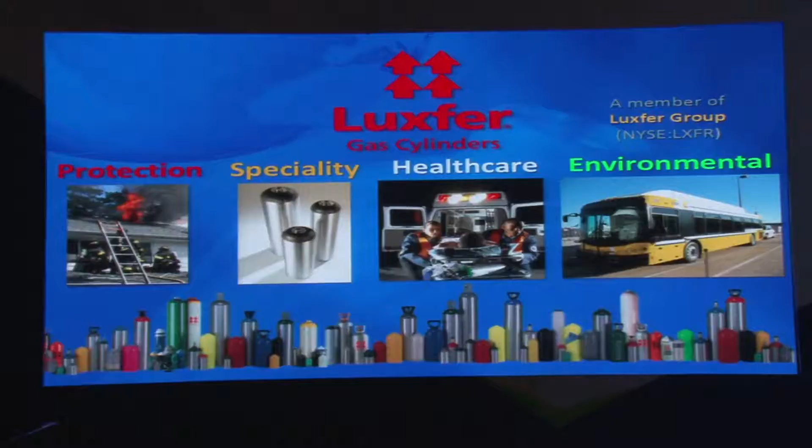One of these cylinders you can see here, very lightweight. 100% of all firefighters in the US have these breathing air cylinders on the back. Today, 70% of all firefighters in Europe have this lightweight construction on the back. This is just one of our products. You can also see protection used in the aviation industry, inflation cylinders for oxygen supply. These are all from our typical product range.

Mainly in Asia Pacific, South America, and other parts of the world, we are still thinking in steel. I've been working since 1989 on composite materials, and you can see how far advanced these composite materials are today in this slide. For instance, the A380 has today 35 tons of structural components made from carbon fiber reinforced plastics. So with every generation we're replacing more and more metals with carbon fiber reinforcements, but other applications as well. Now the carbon fiber industry is starting to penetrate even the automotive industry.

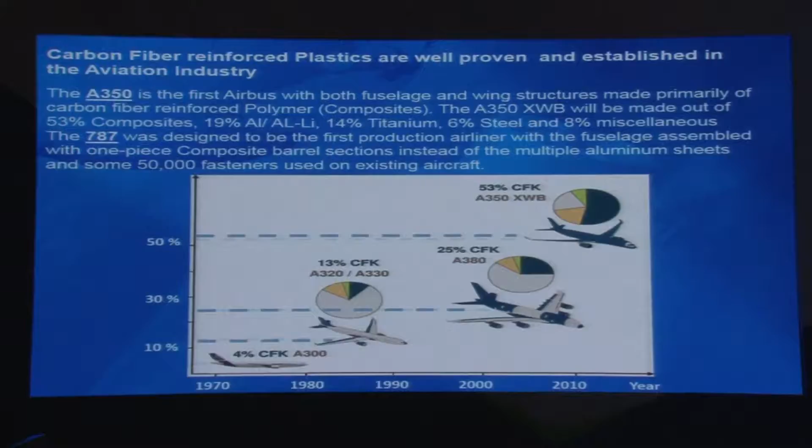If you're buying today a new BMW series, the whole roof and trunk is today made from carbon fibers. So next generation, you can see the development since 1970. The first aircraft had just 4% carbon fiber reinforcement on board. Today, the A350 will have 53% made of carbon fiber reinforced plastics.

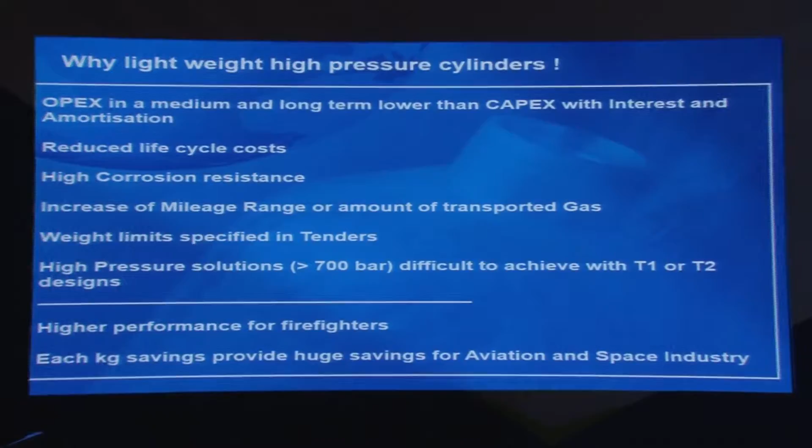So why lightweight high pressure cylinders? For firefighters and other applications, it's more convenient. Firefighters show much higher performance if they have a lighter cylinder on the back. But in the end of the day, for gas transport, for automotive, especially in Europe and the US, we are thinking OPEX, meaning operational expenses. So we are not so focused on CapEx. Of course the first investment is important too, but we are looking as well at the operational costs.

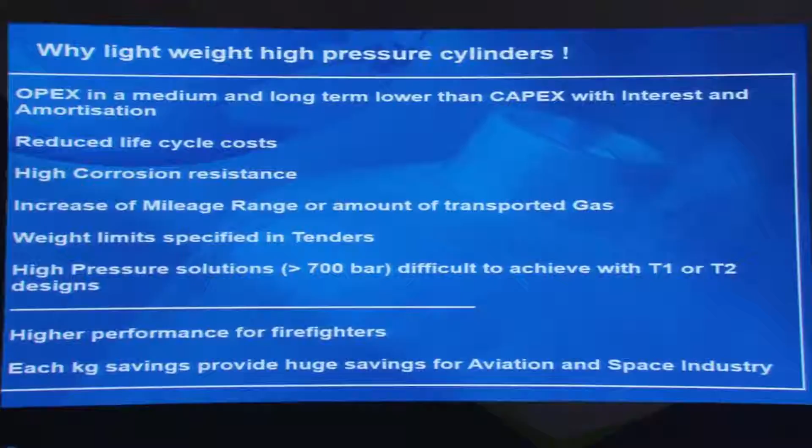So a lot of advantages, and now we are looking at the hydrogen economy and hydrogen vehicles in the future, which we are expecting soon, especially in Europe, where we have to build 700 bar service pressure cylinders. Can you imagine the explosive load in a 700 bar cylinder filled with hydrogen? One of the backgrounds is that Germany wants to be more and more independent, and you can see last year 30% of all electricity was made from renewables.

So it's a little bit insane: we have today 22,000 windmills, and the majority of this green energy, 13.3%, is coming from wind energy, followed by biomass, solar power, and hydropower. So in this energy mix, the intention of the German government is to lift green energy up to 50% content by 2030.

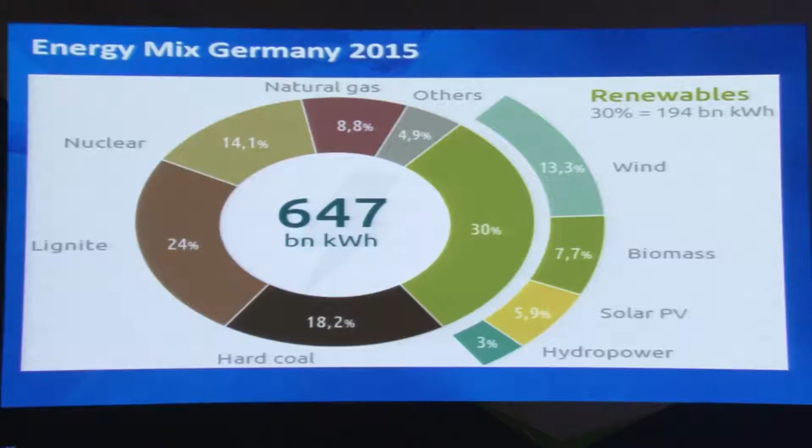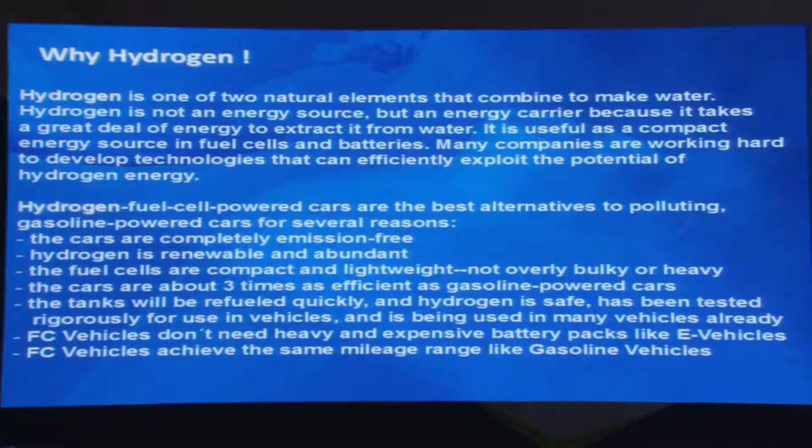One of the intentions is to use this green energy to make hydrogen. So you take water, and by electrolysis you make hydrogen out of the water, and we put the hydrogen in the car so that we have a complete green supply chain. So why is the automotive industry still thinking about hydrogen-powered cars? Because this car will provide the same mileage range as vehicles today, and it will have the same weight as vehicles today. That's mainly why they say hydrogen is the only future.

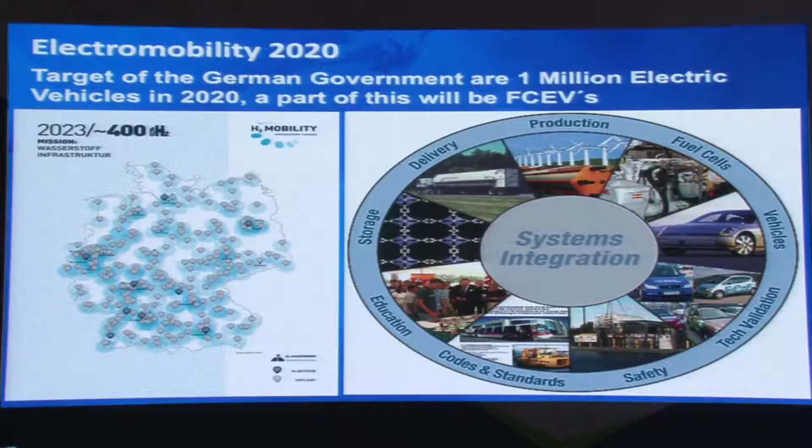We have a government program called Electromobility 2020. The first 20 hydrogen filling stations are in operation. It's the intention of the German government to have 400 public hydrogen filling stations by 2023, with full safe system integration. That's a hell of work behind it. It starts with hydrogen gas transport, where we are thinking today about 500 bar containers to transport the gas, the hydrogen beside liquefied hydrogen.

But in the end of the day, if you see the requirements coming for the vehicle, the standards for hydrogen-powered vehicles or fuel cell vehicles, it's way beyond CNG or LNG or LPG. They are doing much, much more, and typical examples you can see here in the snapshots.

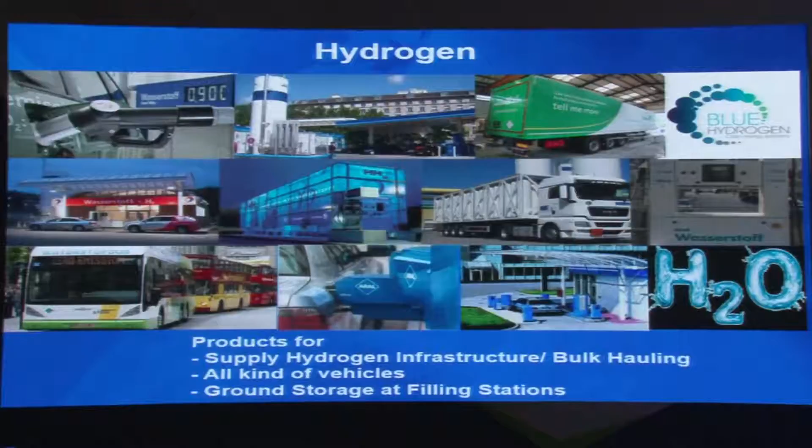Dispensers are already available. We have already 20 hydrogen filling stations in operation. Since 1997, buses are on the road in cities like Hamburg or Stuttgart, with very good field test experience, and the automotive industry is working to improve fuel cell vehicle performance. For example, the A-Class, built with a fuel cell in 2004, followed by the B-Class in 2008, shows improvement in range and size of the gas tank systems.

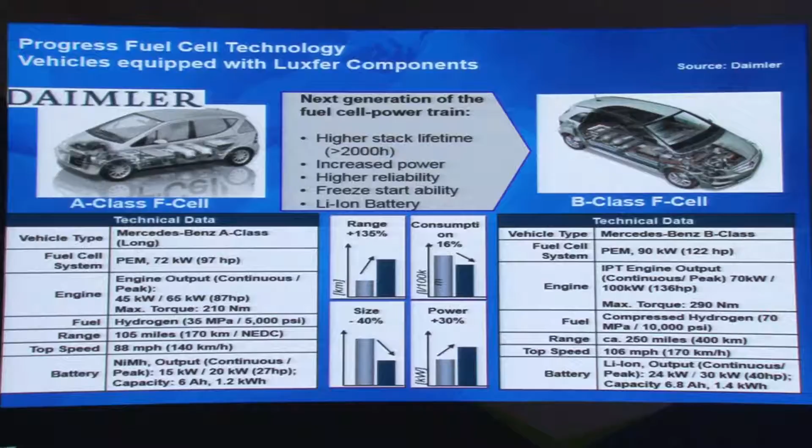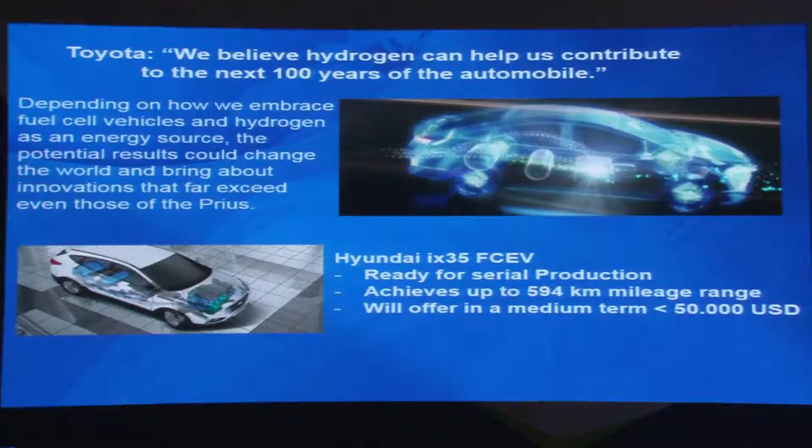Anyway, I'll repeat: standards for hydrogen vehicles are far beyond other standards, and the CNG, LPG, and LNG industry should learn from this. Even if you Google Toyota hydrogen, you'll find very interesting information. Toyota is highlighting that they see the fuel cell car as the future, as they saw the hybrid 20 years ago.

Hyundai is very far advanced, spending hundreds of millions of dollars every year, and the Hyundai iX35 is ready for serial production. It already achieves close to 600 kilometers mileage range, and in the medium term this car will be available for less than $50,000. For the US in 2014-16, the Toyota Mirai and other vehicles are already planned and ready for sale.

The question is now chicken and egg: where's the infrastructure coming from? But in the end of the day, especially in Germany, we are working hard on this. Our expertise comes from 20 years working on hydrogen systems for vehicles. We've equipped hundreds of buses, vans, forklifts, and other vehicles.

We are talking today, for instance, about bus systems with a service pressure of 350 bar. The filling pressure is always 440 bar to have the right temperature compensation, and the automotive industry wants up to 40 kilograms of hydrogen on board at 350 bar.

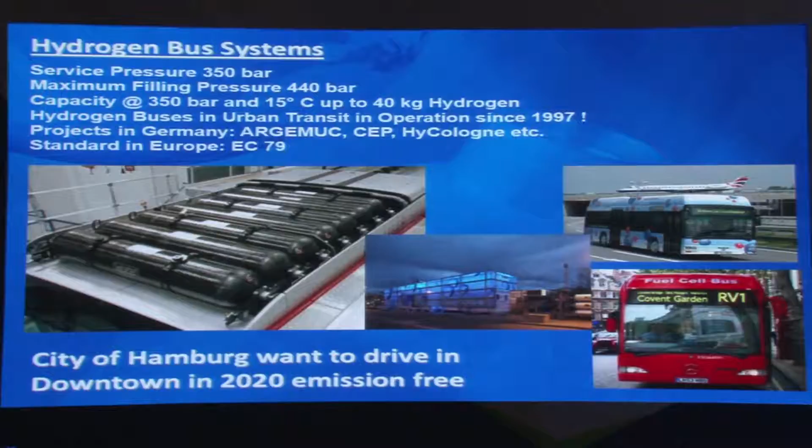We've had many projects, even at airports in Germany, and interestingly the city of Hamburg has made the commitment to drive emission-free by 2020. That means we will see, especially on the bus side in Hamburg, a mix of pure electric buses and hydrogen-powered buses. North America is working on hydrogen as well, not as much as Europe, but we have a lot of prototypes running too.

Where are the technical challenges? For instance, the valve. If you see an LPG valve today, you can buy it extremely cheap. The valves we have to make for 350 bar and 700 bar hydrogen are really complicated, and at the moment there are just 3 companies which have certification to bring it into operation.

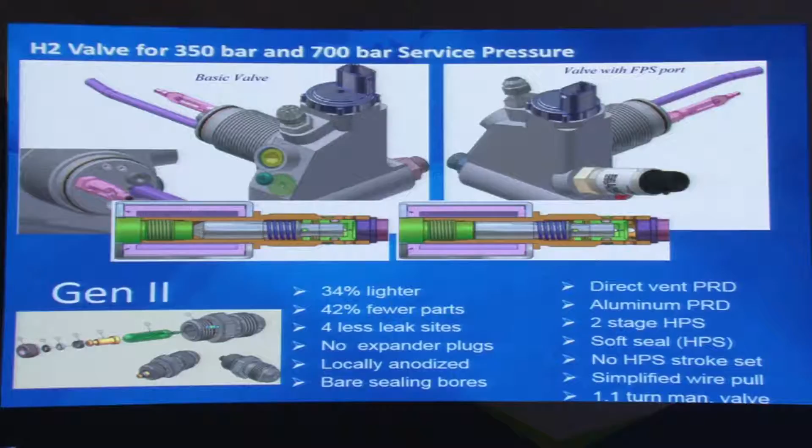We have an integrated pressure sensor, an integrated temperature sensor, and of course pressure relief devices, and the valve and the car communicate with the dispenser. That means we measure online the temperature during fast fill, and as soon as the temperature goes beyond 85 degrees C, the car tells the dispenser to stop filling, because more than 85 degrees is not allowed.

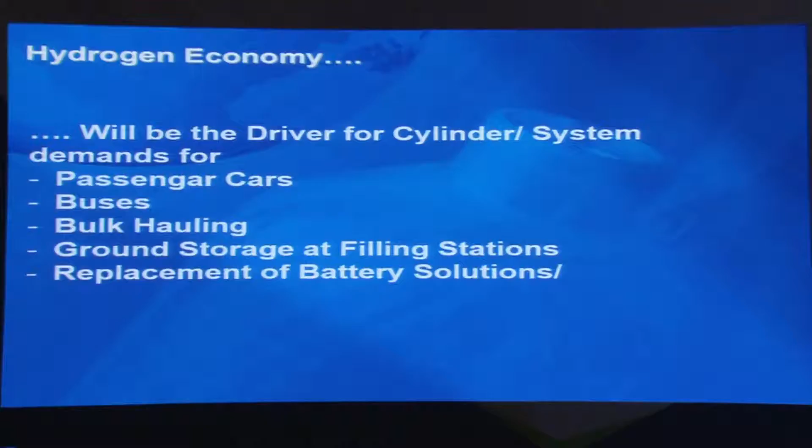That makes it really complex, and if I'm talking about just a regulator, it makes it even more complex, because we have to regulate down from 700 or 840 bar to 11 bar, and we have to provide a very precise hydrogen gas flow from around 0.5 up to 2 grams per second.

Very difficult. Anyway, the hydrogen economy, especially in Europe and North America, will be the driver. In the end of the day, we are looking to equip passenger cars and buses. The economy for bulk hauling means hydrogen gas transport will increase.

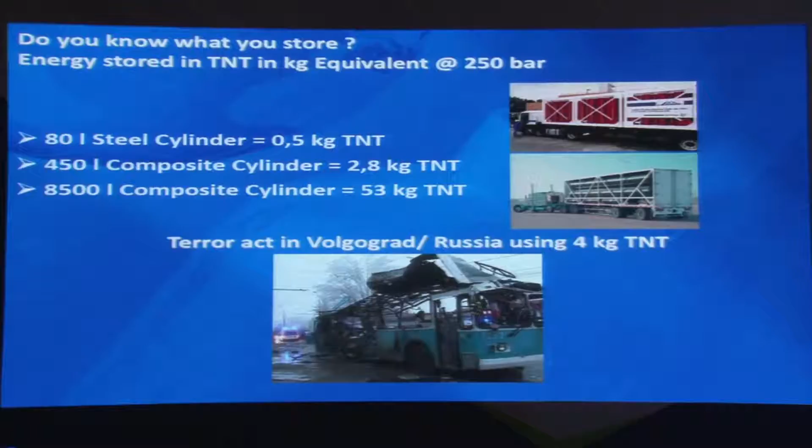And again, back to safety. Bear in mind the energy you have on board. An 80-liter steel cylinder operated at 250 bar is equivalent to 0.5 kilograms of TNT. A 450-liter composite cylinder is equal to 2.8 kilograms of TNT. That's the explosive mass, so we always say safety first.

And what happens with 4 kilograms of TNT during a terror attack, as in Volgograd, you can see in the picture below how the buses look.

Anyway, I think I'm over time now. I'll finish my presentation here. I have a couple more slides, but I think that's it. I hope it was interesting to talk a little bit about hydrogen, not hydrocarbons, but in the end of the day it's dangerous too, and we have to take care of safety. Many thanks for your attention.

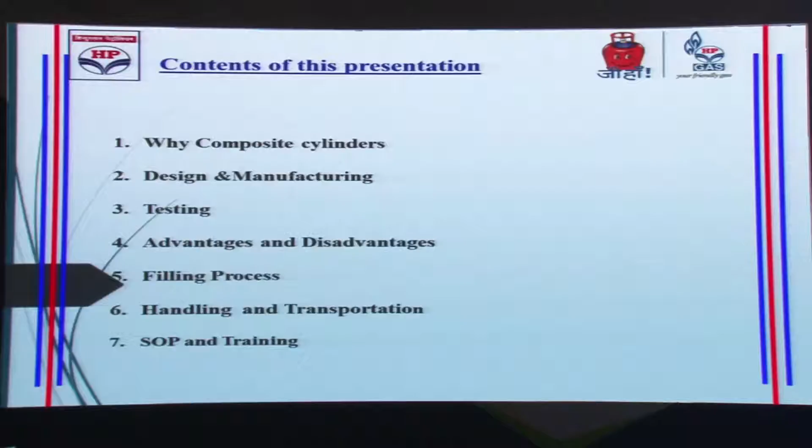You can understand that to deliver 14.2 kg cylinders in a container of 16 kg, how much resources have to be engaged to transport the cylinders from bottling plant to the dealer's premises, and from dealer's premises to the consumer's premises. It is a heavy weight, and it has to be handled manually, physically at the LPG bottling plants, as well as at the distributor's LPG godown, and finally at the LPG consumer's home.

What is the solution for this? The composite cylinder comes and offers an option for us to supply the 14.2 kg LPG cylinders in a container of weight 8.8 kg. The weight ratio comes down from 1.1 to 0.66. That is the requirement why we should go for composite cylinders.

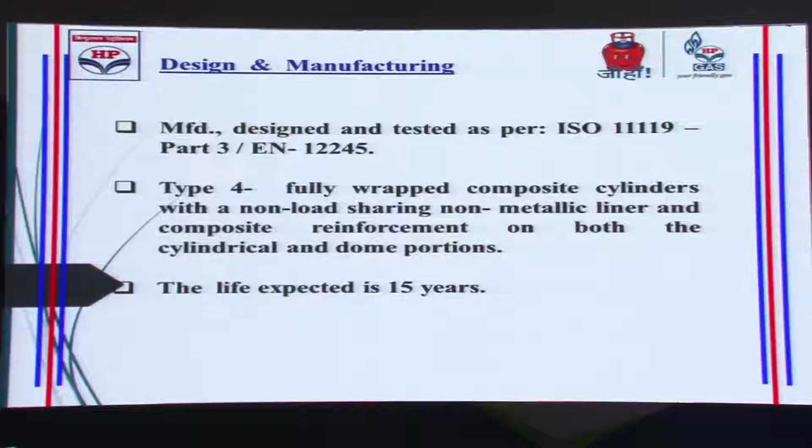I won't go into much technical detail because there is very short time available right now. These composite cylinders are manufactured, designed and tested as per ISO 11119 Part 3 or EN 12245. It is type 4, which is fully wrapped composite cylinders with a non-load sharing, non-metallic liner, composite reinforcement on both the cylindrical and domed portions. The life of cylinders is expected to be approximately 15 years.

The composite cylinders have got 3 layers. The first layer inside the cylinder is a blow molded liner made out of HDPE, which is a seamless inner gas-tight layer. The boss is made of injection molded HDPE with a steel insert so that the valves can be fitted onto the cylinders. Layer 2 is the most important layer.

It is the composite load carrying material, which is filament wound fiberglass and epoxy resin, which has a tremendous capacity to withstand the tensile stress due to gas pressure inside the cylinders. The third layer is the injection molded outer casing, which protects the pressure vessel and valves and makes it convenient for handling.

In the manufacturing process, blow molding happens for the inner layer. Then the boss welding takes place. Then filament winding across the cylindrical portion as well as the dome portion takes place. It goes for baking, resin baking, because it is mixed with the resin. And finally, the outer casing fitment is done so it can be handled properly.

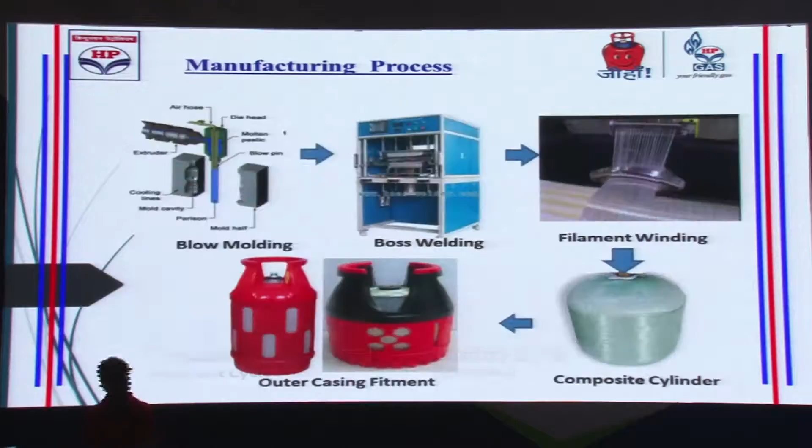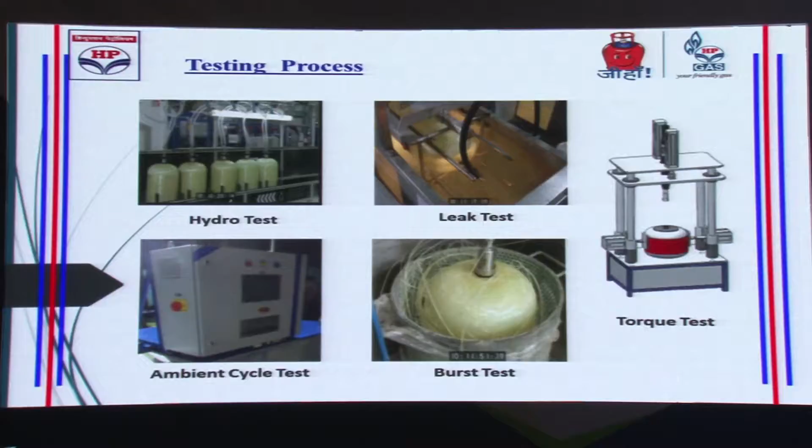These are the testing processes. The cylinders are tested for hydro testing. Pneumatic testing is done for the leak test. The torque test is done to find out the strength between the HDPE casing and the valve, with the steel item used for fixing the valves. The burst test and the ambient cycle tests are also conducted on these cylinders.

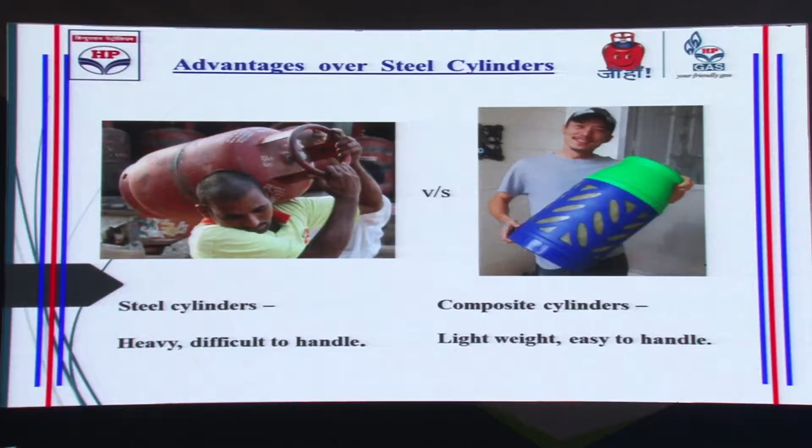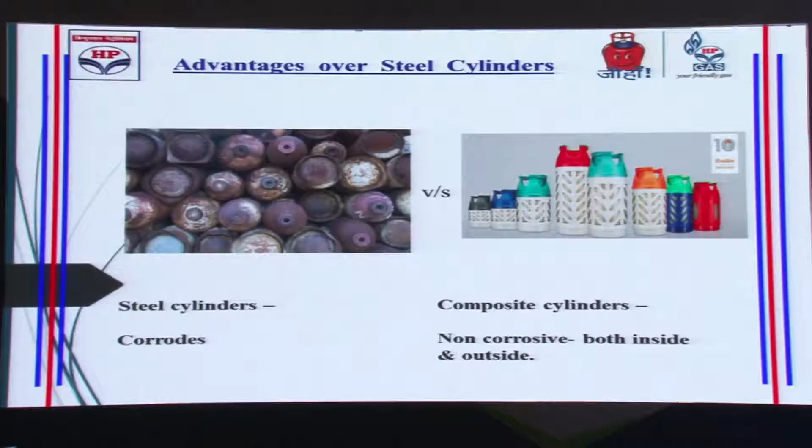Now I would like to talk about the advantages of composite cylinders over steel cylinders. Steel cylinders are heavy and difficult to handle. Composite cylinders are lightweight and easy to handle, as you can see that it can be handled by arms and not by shoulders. Steel cylinders are corrosive to the atmosphere, while composite cylinders are non-corrosive from both inside and outside.

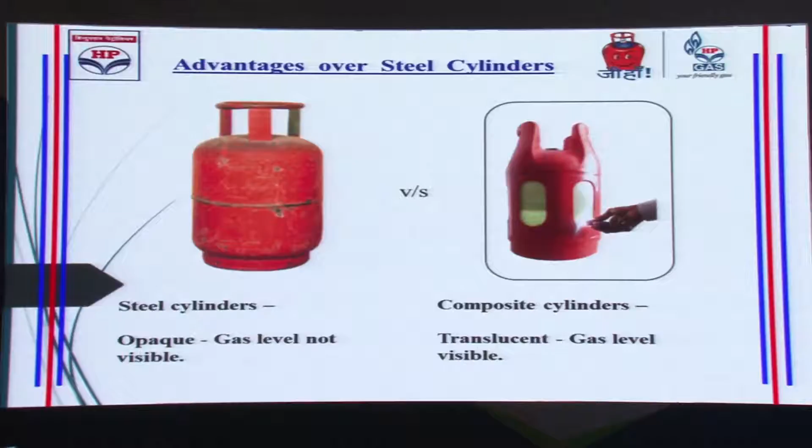There are other advantages of composite cylinders. Steel cylinders are opaque—you cannot see inside what the LPG level is. Composite cylinders are translucent, so the gas level is visible. It is aesthetically appealing, comes in different designs, and can come in vibrant colors.

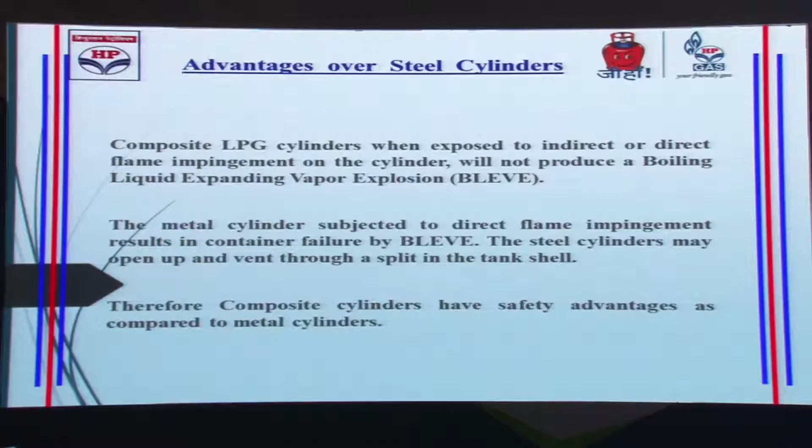The advantage over the steel cylinder is the safety advantage: composite LPG cylinders, when exposed to indirect or direct flame impingement, will not produce a boiling liquid expanding vapor explosion (BLEVE). When a metal cylinder is subjected to direct flame impingement, container failure may result in the steel cylinder opening up and venting through a split in the tank shell. Therefore, composite cylinders have a safety advantage compared to metal cylinders.

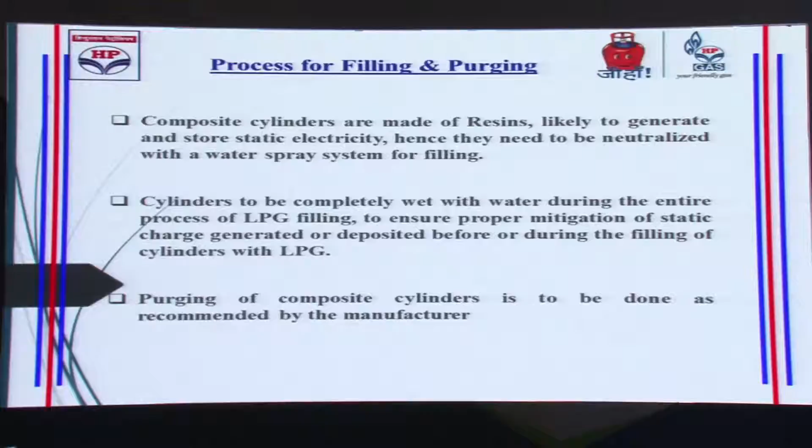What should be the process for filling and purging these cylinders? The composite cylinders are made of resin, which is likely to generate and store static electricity. Hence, they need to be neutralized with a water spray system during filling. The cylinders should be completely wet with water during the entire LPG filling process to ensure proper mitigation of static charges generated or deposited before or during filling. The purging of composite cylinders is to be done as recommended by the manufacturers.

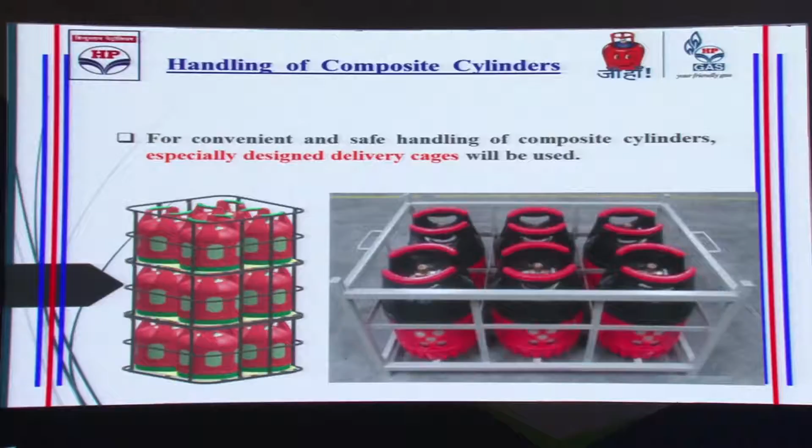Regarding handling of composite cylinders: for convenient and safe handling, a specially designed delivery cages has to be used, as shown in the picture. The composite cylinders should be transported along with their delivery cages only in a vertical, upright, and capped position. They are to be stacked separately from the steel cylinders.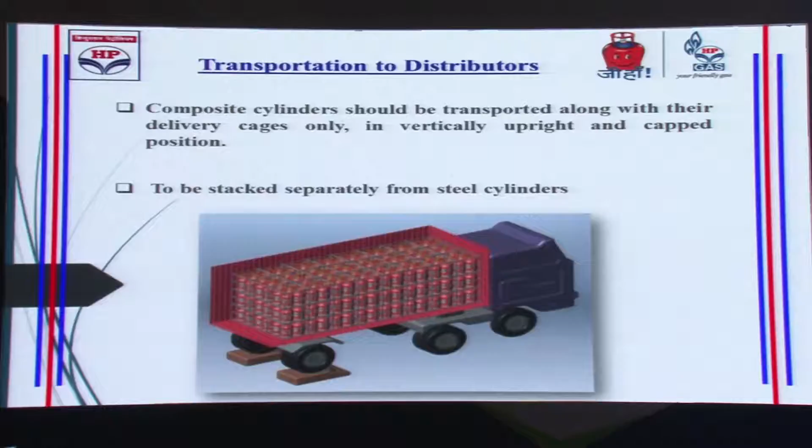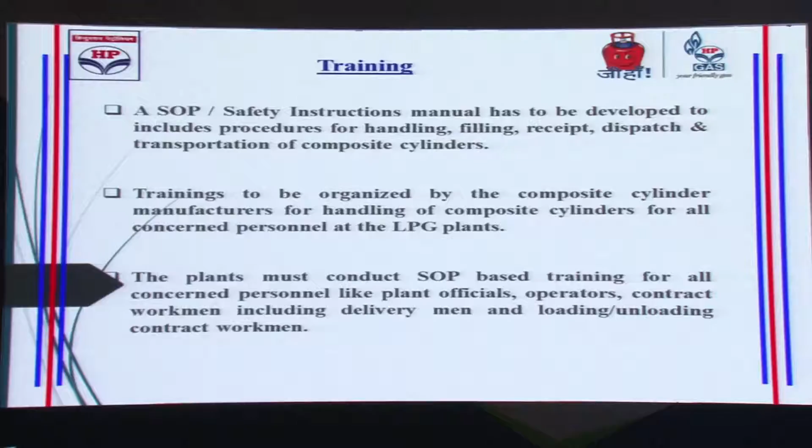What should be the training for using these composite cylinders? A safety instruction manual (SOP) has to be developed covering procedures for handling, filling, receipt, dispatch, and transportation of composite cylinders. Training is to be organized by the composite cylinder manufacturers for handling of these cylinders for all concerned personnel at the LPG plant. The plant must conduct SOP-based training for all concerned persons like plant officials, operators, contract workers, including delivery men, and loading/unloading and contract workmen.

What is the way forward? The development of Indian standards for composite cylinders is in progress. Mostly we are taking help from ISO standards and EN standards. As of now, it is being manufactured as per ISO 11119 Part 3 and EN 12245. The further course of action is to be decided based on feedback, experiences, and further details on the following points.

As HPCL, we have already procured 5 kg and 10 kg LPG cylinders. Even 2.5 kg LPG cylinders we have procured, and we are likely to market them, with pilot marketing to be done in selected markets in the country. We will also be procuring other capacity cylinders like 7.5 kg and 14.2 kg.

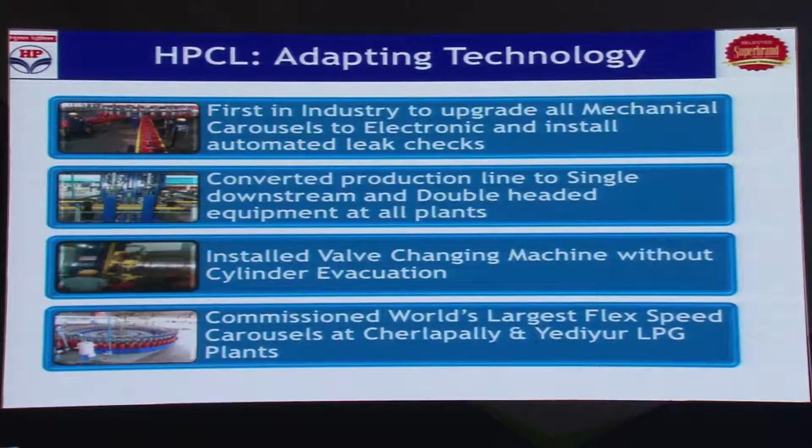HPCL has been the pioneer in adopting technology in the industry. We were the first in the industry to upgrade all our mechanical carousels to electronic and install automated leak checks on all the plants. We converted production lines from 2 lines earlier to a single line, and installed a valve changing machine without cylinder evacuation, the first one to do that. And we have commissioned flex speed carousels, 2 of them - one at Cherlapally, that's Hyderabad, and another at Bangalore.

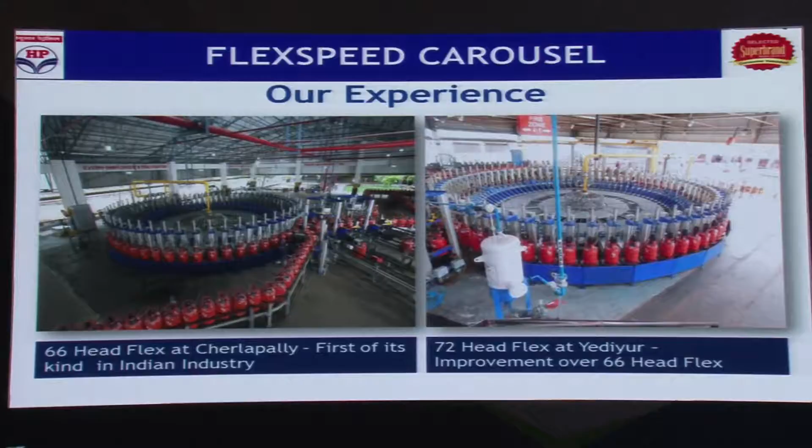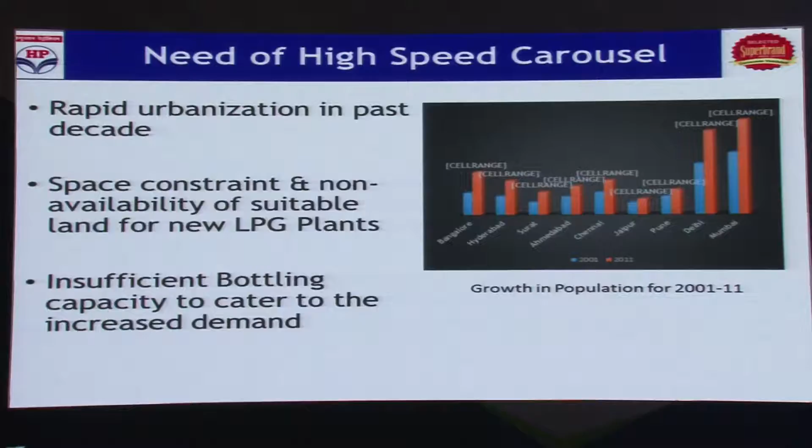Now, when we constructed these bottling plants, they were built well away from these cities. But over a period of time, due to urbanization, habitation has encroached close to our plants also, and there is no space left for any further expansion of the plants. And also, wherever space is there, we are not so keen on spreading our facilities thin to avoid logistical problems.

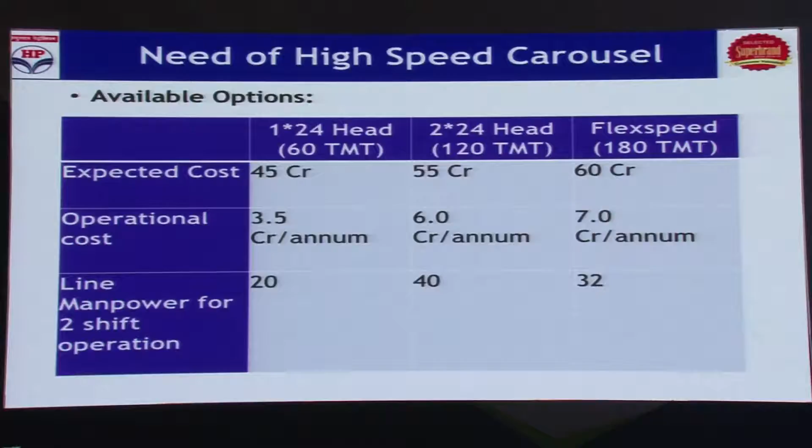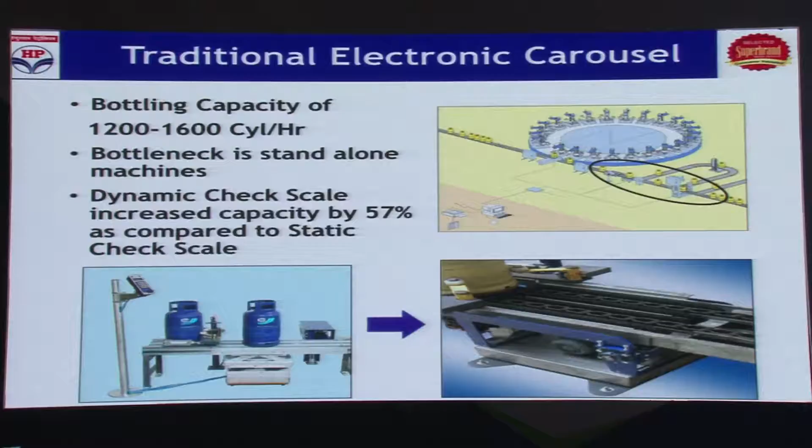The high-speed filling systems offer substantial cost advantage compared to conventional systems. In the particular case we were talking about, we had 2 filling systems, 2 24-head filling systems, with a static check scale with a single test head downstream equipment. As the capacity became a constraint, we shifted to a dynamic check scale and double-headed checking equipment. That lasted us for a couple of years, and after that we started again feeling the pinch.

That's when we started looking for options, and we collaborated with one of our pioneers in the bottling equipment manufacturing field, Kosan Crisplant, for working out a high-speed system. This high-speed system we developed along with Kosan Crisplant.

This has resulted in reduced space requirement for the system, and also improved speed. We have been able to have a flexible speed between 2,000 cylinders per hour to 4,200 cylinders per hour, and there has been a substantial improvement in quality, reliability and repeatability as well. This is the layout - we have been able to accommodate this carousel in the existing system itself, in the existing shed, without adding any further structures to the plant.

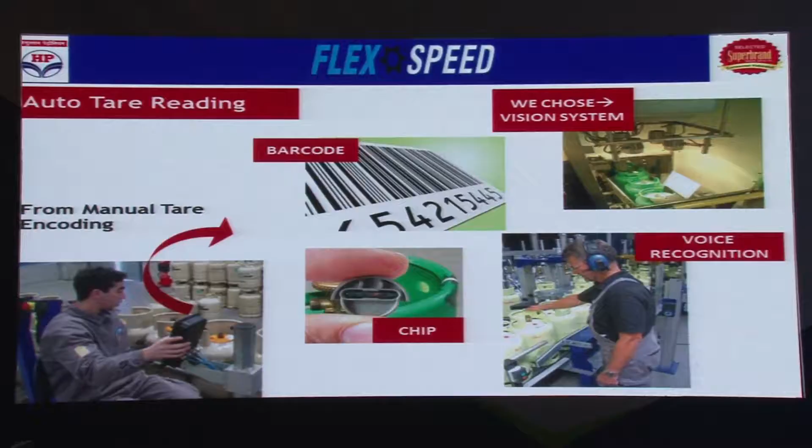When we started working on this, the first challenge that came to us was about tare weight encoding for these cylinders. The existing system was a manual tare weight encoding station, which we did not consider for this system because of the manual intervention required, and also the capacity constraint.

We have looked at bar coding, but we have not gone in for it because of the huge work that has to be carried out on the cylinders, and also our experience with bar coding when we tried earlier has not been that good in this field. Another technology considered was RFID, which involved a lot of working on the existing cylinders, which would have been a mammoth task with huge cost implications. We have not taken up that as well.

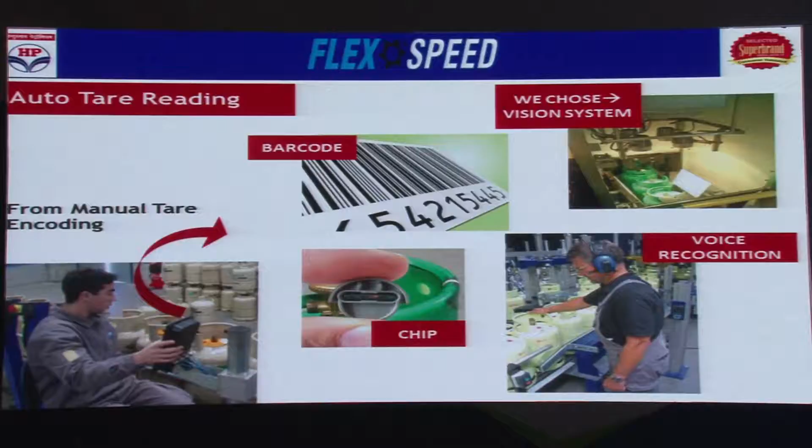Another system offered by the manufacturer was voice recognition. This also we have not taken because again there is manual intervention in the system. Finally, we have gone in for the vision system, which doesn't require any working on the existing cylinders, which can just be installed and the operations can be started.

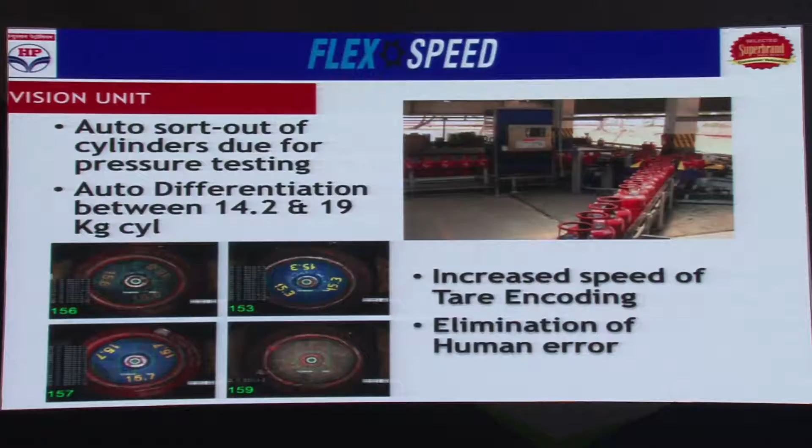When we have taken the system, these are the various factors that have been included: elimination of human error and auto differentiation between 14.2 kg and 19 kg cylinders by identification of the color.

After choosing this system, we identified certain challenges in making it successful in the initial stage itself, and we started working on that. As part of that, we took this vision unit 6 months in advance, before the original equipment came, before the Carousel came to the plant, and started working on the cylinders so we could make them ready by the time installation started.

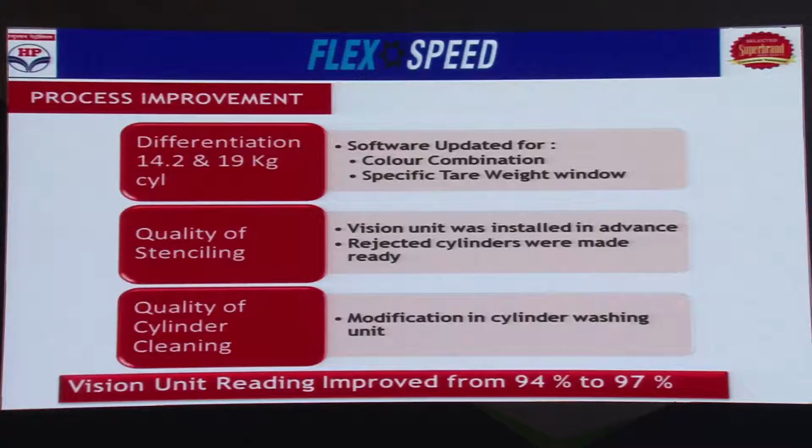We have made the rejected cylinders ready for reading by the vision unit. Also, during this activity, we worked on a specific tare weight window for 14.2 kg and 19 kg, so that an additional safety measure will be there for the cylinder, so the system will not mistake one for the other.

Another requirement we found is the quality of cylinder cleaning for proper reading of the tare weight of the cylinder, which was required, and certain modifications were carried out in the washing units.

Basically, this is the principle of the flex speed carousel. Unlike regular carousels, which have a load cell for each filling scale, here there are only 5 load cells installed on the ground. On that, you can build your carousel with the combination that you choose - it can be a 40 filling post machine, a 50 filling post machine, or a 100 filling post machine. The weighing scales will remain 5 under the carousel.

The first scale is for zero setting, the second for measuring the residual gas, the third is to measure the filling trend, the fourth is to measure the top-up requirement in the cylinder, and the fifth is the check scale. That's the peculiarity of this carousel.

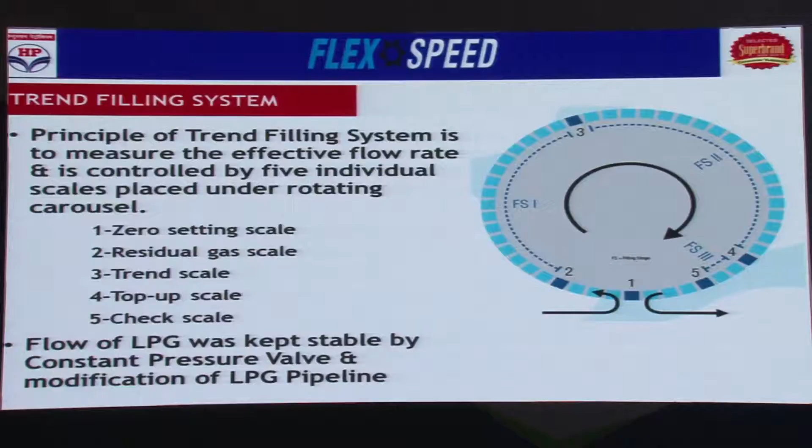This posed the second major challenge for us, wherein we required to maintain constant pressure in the LPG supplied for filling. We have been able to achieve that by carrying out certain modifications in the pipelines and introducing a constant pressure valve in the system.

Now this is where the advantage is for check weighing on the carousel itself - you get additional time of almost 150% more than you get in a regular check weighing system.

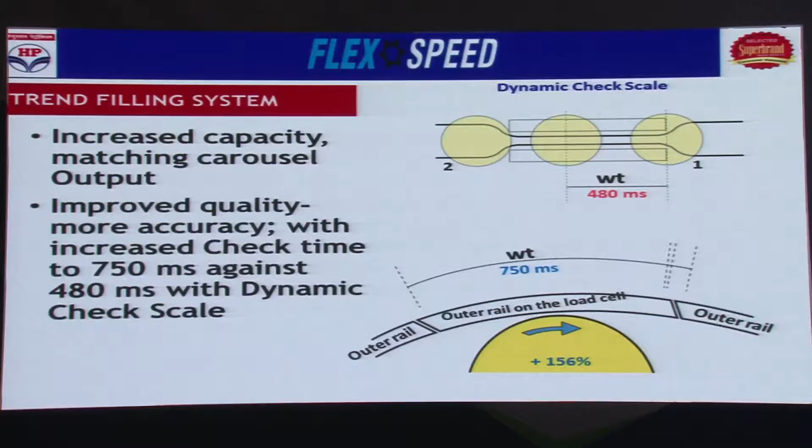In the system, there are 2 sub-carousels, 2 mini carousels attached to this main carousel, wherein the leak tests are done for both the valve and the O-ring, and you get additional time because of the carousel arrangement in the system.

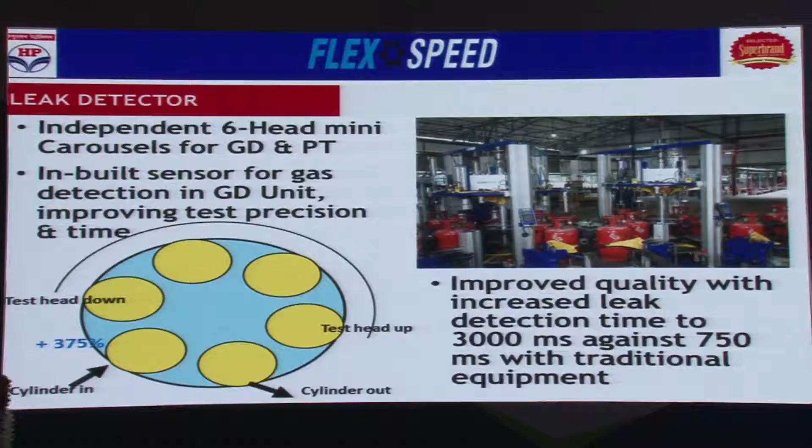Around almost 300 to 400% additional time you gain, and that gives us reliability and repeatability in leak testing of the cylinders filled. You have variable speed conveyors to vary your requirement of filling, which will give you power saving as well, along with variation in speeds as per your requirement.

The star wheel mechanism gives you smoothness in the flow of the cylinders in and out.

Finally, these are the benefits with the system we have adopted: more capacity in a small space, and less cost per cylinder filled. Better reliability and repeatability resulting in better quality. Less manpower requirement, and flexibility according to your requirement in a day. Optimum air and power consumption, and you have full statistical control.

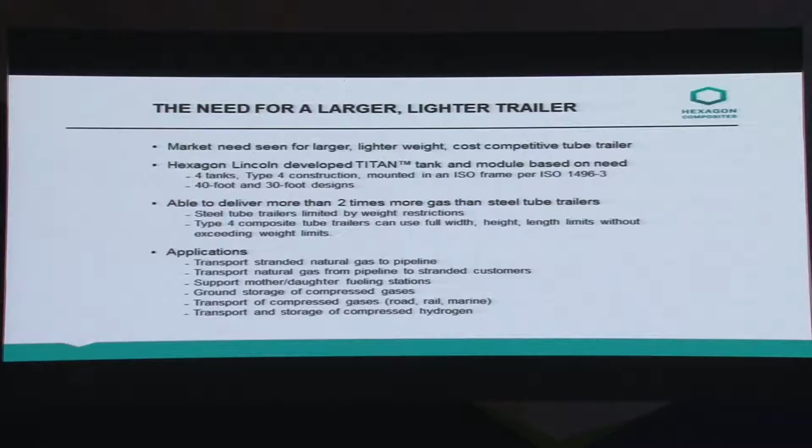Sometimes you have a good problem when you're a technology company with a product people recognize - there's a gap in the market. In this case, there was a market need in the United States and worldwide for larger, lighter weight, cost-competitive tube trailers. To meet this need, Hexagon developed the Titan tank, a large composite, all Type 4 composite tank, and the module and trailer systems that make that tank usable.

Our workhorse is the Titan module, which is a 40-foot ISO container. We also have a 30-foot version used in Malaysia, but the baseline is a 40-foot ISO container with 4 of the large 8,500-liter tanks in it.

This system delivers more than 2 times more gas per load than the previously existing steel tube trailers. In the United States and most areas, the capacity of steel tube trailers was limited by weight restrictions for highway use. Our Type 4 composite tube trailers allow logistics companies to use the full width, height, and length limits of the regulations in their areas.

The applications these are used in: transporting stranded natural gas to a pipeline, transporting natural gas from a pipeline to stranded customers - this has been our primary market to date. Supporting mother-daughter fueling stations, as our modules are used in Thailand and Malaysia. They can be used for ground storage of compressed gases, for transport by highway, railway, and marine, and also for the transport and storage of compressed hydrogen.

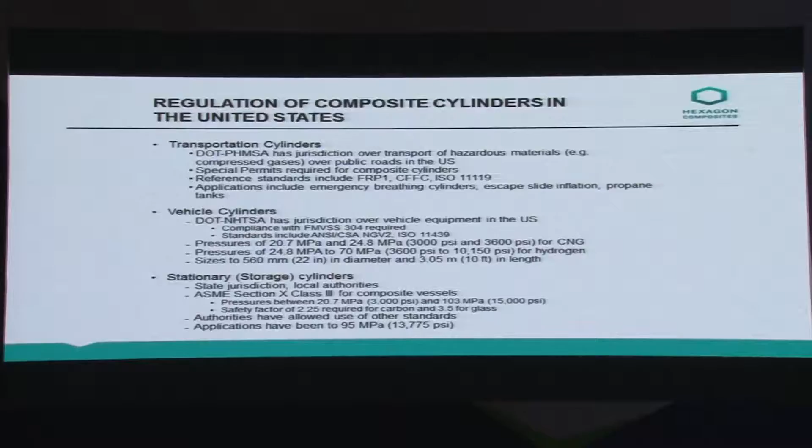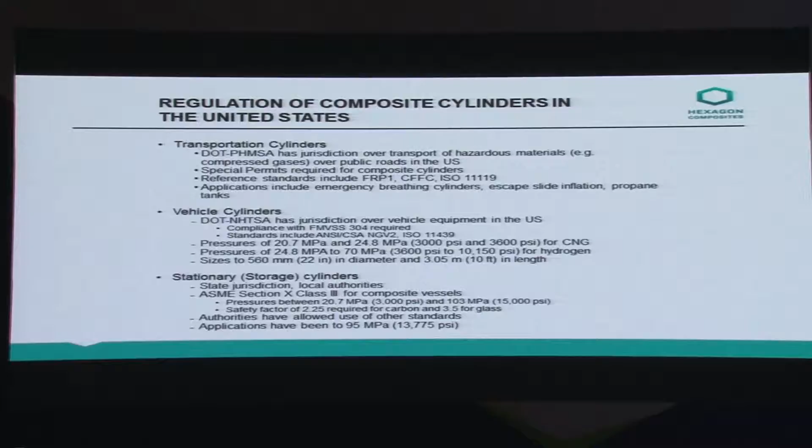Vehicle cylinders, the fuel tanks on vehicles, are covered by DOT NHTSA, the National Highway Traffic Safety Administration. As far as the cylinders, they want compliance with a particular code. They recognize industry standards, then limit the pressures to basically 20 MPa and 24-25 MPa for natural gas, and 25 MPa up to 70 MPa for hydrogen. The sizes are basically limited to a 450-liter cylinder.

Stationary storage cylinders are covered by state jurisdictions and local authorities like fire marshals, and they typically reference ASME Section 10 for composite cylinders. They will allow the use of other standards if appropriate. We have cylinders rated and in stationary service up to 95 MPa actually.

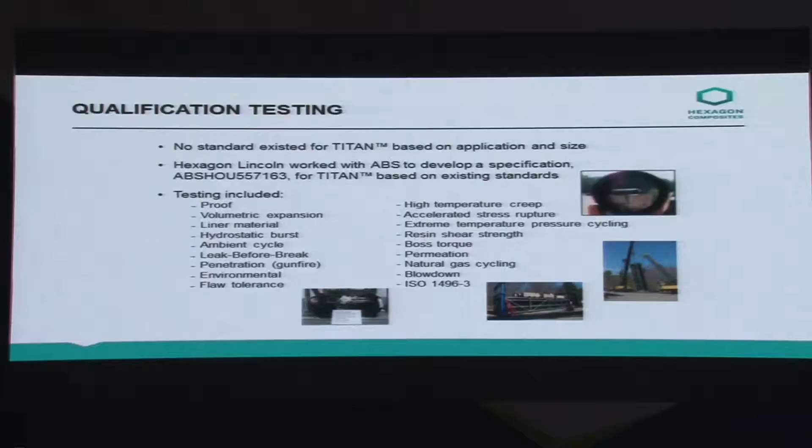When we want to take a request for a special permit to our Department of Transportation, and there's no existing standard to do that, we seek out the help of a certification agency - in this case, the American Bureau of Shipping. I'm sure many people are familiar with them. They have mechanisms in place to write new certifications for novel technologies, and we worked with them to develop a specification based primarily on ISO 11119-3, which you heard referenced earlier with reference to the propane cylinders.

There's a long list of tests that we had to do: extensive cycle testing, testing at temperature extremes, flawed cylinder testing, gunfire testing of cylinders - the whole gamut appropriate for composite cylinders.

The additional part we had to do is show that these cylinders were mounted in a robust container, a framework that could keep the bad things that happen in the world from impinging on the cylinders. The pictures at the lower right are some of the ISO container testing we had to do. These containers meet all the requirements of ISO tank containers.

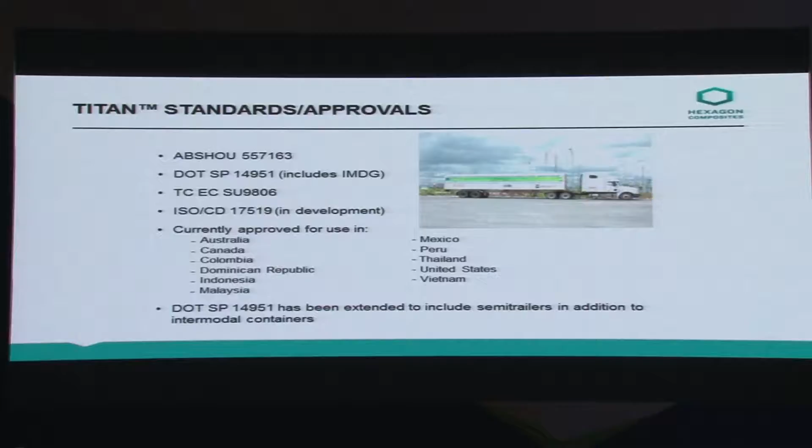So we worked through all that. We developed the ABS standard, and that got us going, and we fielded our systems in many countries using the ABS. Ultimately, we did receive a special permit from our Department of Transportation, SP 14951, and this was initially for the containers, as you see in the picture here.

But this has very recently been extended to trailer systems, which integrate the suspension and the trailer frame, and the tanks are mounted in a monolithic structure. We currently have approvals for use of our cylinders in the countries you see here. Most of our cylinders have gone to Mexico, South America, the United States, and Canada. In addition, we have many systems operating in Thailand and Vietnam. I believe we actually have 94 Titan modules operating in Thailand.

And as I said, it's been now extended to include semi-trailers. Now, when we get a special permit from our Department of Transportation for something new, we are very heavily scrutinized to make sure that this has been a good decision and a good thing for public safety in particular. Now, when things are operating on the highway, there are things that are going to happen.

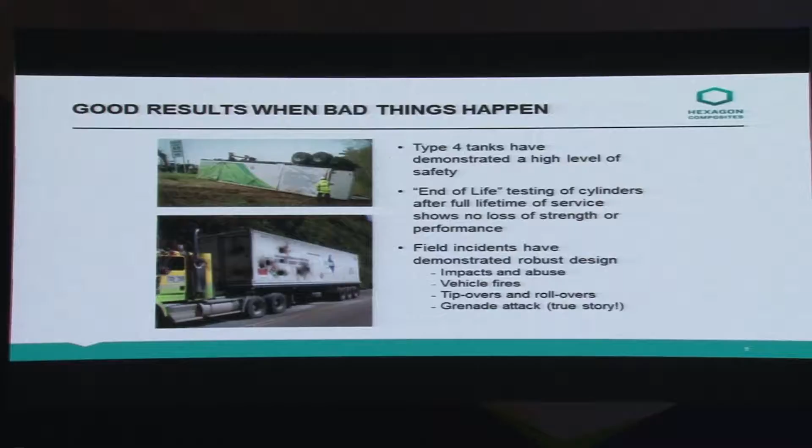Our most common cause of accidents, for our customers anyway - the logistics companies that buy our equipment - is actually drivers falling asleep. Depending on when the World Cup soccer is, during that week or period, there seems to be a spike in accidents because the drivers are staying up all night to watch soccer games and then not paying attention when they're driving, perhaps. So be aware during World Cup.

But anyway, our Type 4 systems have demonstrated a very high level of safety since the very beginning of our business, more than 20 years ago. Matter of fact, we pull cylinders in after they've been in service for their entire specified life, and we do burst testing and cycle testing, and they basically show no loss of strength or performance.

As I said, when you're out in the world, bad things do happen. We've had tip overs and rollovers. The upper picture was quite a spectacular event which happened in our state of New Hampshire. The driver fell asleep and got the truck off the road. He was going probably 100 kilometers per hour. The module, actually the trailer that the module is mounted on, tumbled basically 540 degrees.

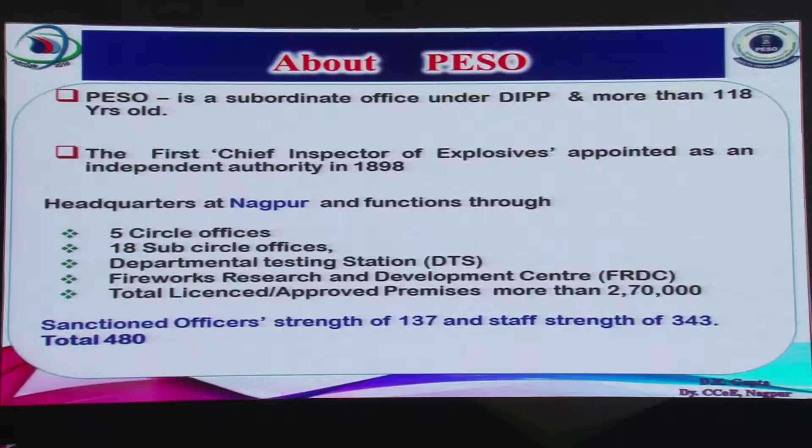Total licensed and approved premises as on date, I am talking about during the year 2015-16 in March, were more than 2,70,000. Whereas the sanctioned strength of PESO, as far as officers are concerned, is 137. So now you can imagine.

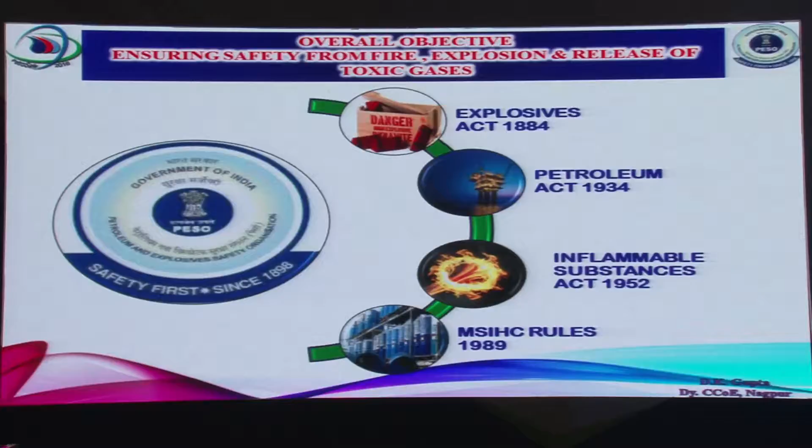The overall objective of PESO is to administer the Explosives Act, Petroleum Act, Inflammable Substance Act, MSIHC rules, and the rules framed thereunder. There are various rules which are framed, but as far as the Petroleum Act is concerned, we have the Petroleum Rules 2002, the Inflammable Substance Act 1952, and the CC has got power under Schedule 5 of the MSIHC rules, that is the Manufacture, Storage and Import of Hazardous Chemical Rules 1989, notified under the Environment Protection Act 1986. Under Schedule 5, CC has got power for approval of LPG pipelines, LNG pipelines, cross-country pipelines, LNG terminals, etc.

If we see the total number of premises during the last 35 years, in the year 1980-81, we had 41,000 premises, where the number of officers was 98. Now, today in 2015-16, we have 2,77,000 premises with only 119 officers. So whereas the premises have gone up more than 600%, the officers' strength remains the same.

But still, with this reduced manpower, we are able to dispose of the assigned work with due diligence. So one has to bear with us if there is any delay in the disposal of some of the papers.

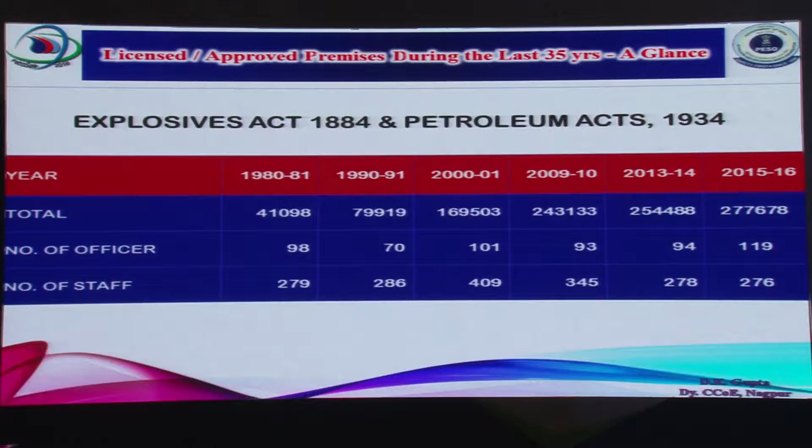Now, if we see the role of PESO, right from import of petroleum to the fueling of the vehicle, PESO's role and industry role comes at every stage.

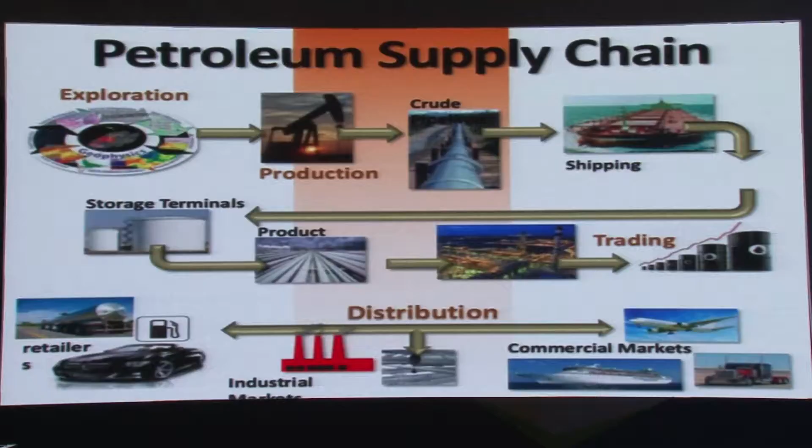The vehicles fueled at service stations are covered under Form 14 of the Petroleum Rules 2002. Auto LPG stations are covered under Form 5 of the SMPV rules. CNG stations are covered under Form G of the Gas Cylinder Rules 2004.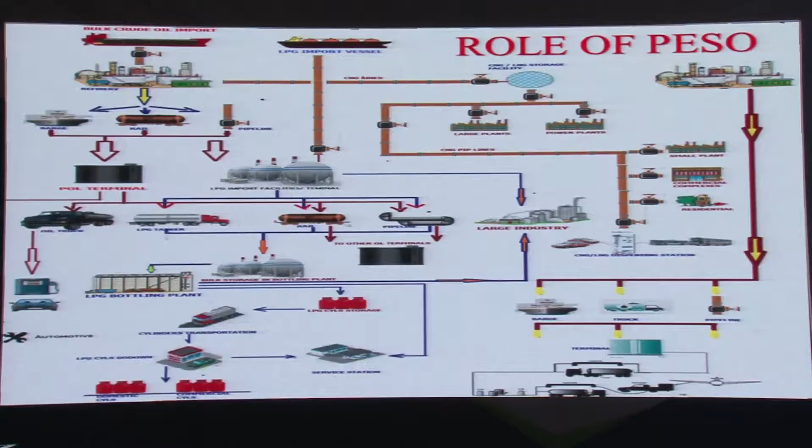Why am I telling this? Because when our own family goes to the service station while fueling the vehicle, it becomes a duty of the regulator and the industry that their or my family is safe. That's why whenever we approve any cylinder, valve or regulator, a lot of rigorous scrutiny of the proposals is done.

Type tests are witnessed as per the code, and sometimes we put additional conditions and additional tests in that proposal. Why do we do that? Because India being a tropical country, conditions in Europe and India are very different. So sometimes we have to add various tests which are not defined in the code itself.

People approaching PESO are sometimes surprised: why do you want this type of test? Then we make them understand this is the requirement, this is the condition of the country, and we assume that my family is traveling in the same car where that cylinder or regulator is installed.

Similarly, for the aviation fuel supply chain, the aircraft where fuel is being poured into it is also licensed and approved by PESO, including the ATF terminal, under Form 15 of the Petroleum Rules 2002.

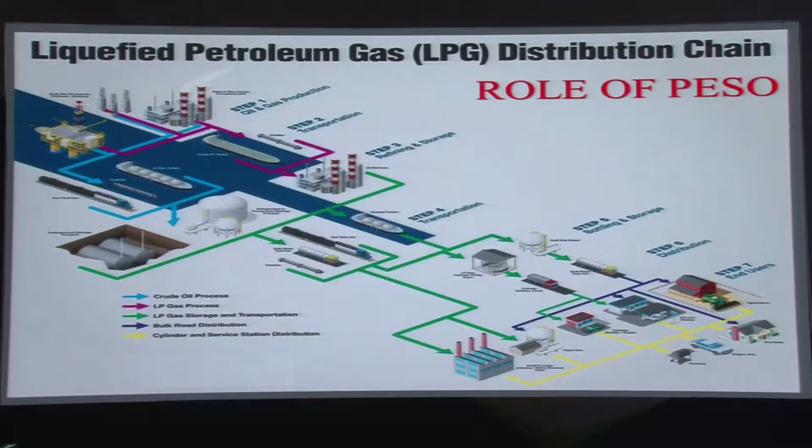Similarly, the LPG cylinder coming to your house, the LPG that is imported or produced in the refinery, its approval is given under Chapter 8 of the Petroleum Rules 2002. The pipelines carrying petroleum from refinery to terminal are also approved by CCE under Petroleum Rules. Industry users using petroleum products in above ground or underground tanks are also licensed under Form 15.

Why am I telling you this? Because the role of PESO is very critical at each and every stage. Although we have a computer module or licensing system on computer, scrutiny is being done by human beings. Any failure on the part of a human being, as we discussed yesterday, will lead to disaster. This is the intention of each and every officer of PESO, being a regulatory body.

Similarly, LNG. The LNG supply chain, right from receipt of LNG to regasification, although not covered under gas cylinder rules or petroleum rules, the approval of such facilities is granted by Chief Controller of Explosives under the Manufacture, Storage and Import of Hazardous Chemical Rules 1989.

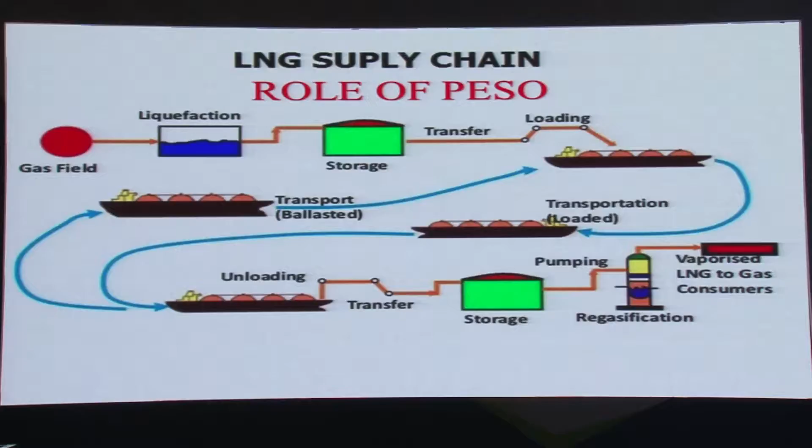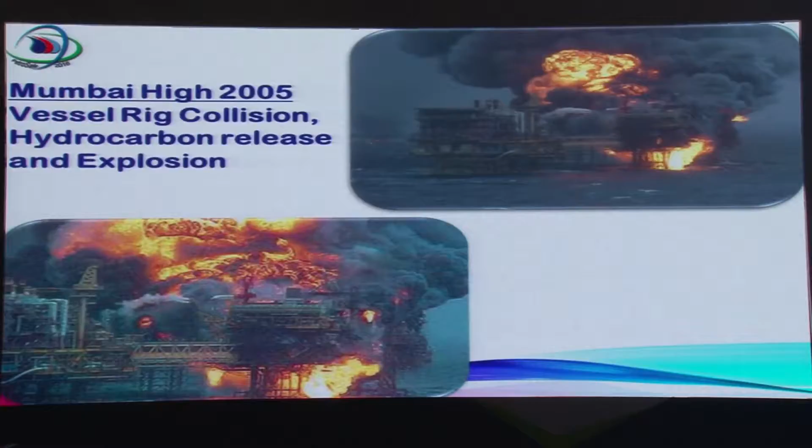So I will just skip this. We try to learn by practical experience. When some accident occurs, then we go into cause and consequences. Why has it happened? Then we come out with various sets of regulations. New regulations will come, and a lot of statutory requirements will be newly framed.

Can't we have a synthetic experience? Synthetic experience means we assume in our brain. I think the human being is the only intelligent being on this earth, and God has gifted brain to the human being only. If I assume that I am doing a particular activity in the industry, I should ask a question to myself: why should it be like that? What will happen if it goes like this? Indirectly, you are carrying out a HAZOP study in your brain before you actually implement that technology.

So that should be the objective. We should try to acquire the synthetic experience so that nothing goes wrong. Accidents cannot be eliminated but can be reduced.

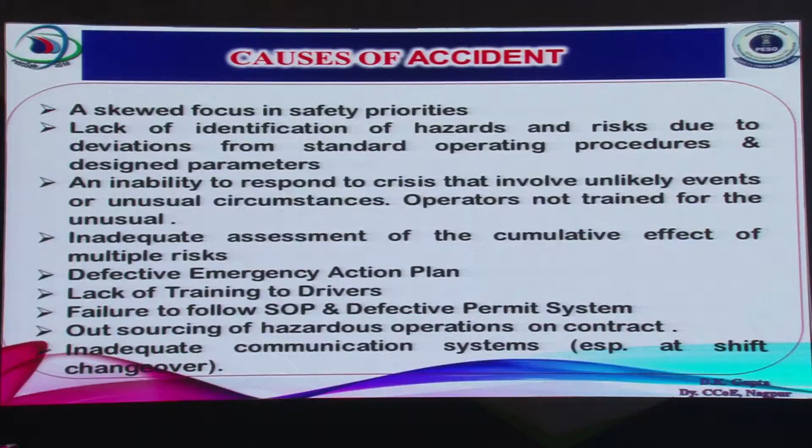If we see accidents during the last 5 years in our country, most accidents have occurred on the road. The second thing is the petroleum service station - the moment I say petroleum service station, it includes the tanker also, which is being unloaded into the petroleum underground tank. So if you see, around 32% of accidents have occurred at the petroleum service station, and around 40% of accidents have occurred during transportation of LPG and petroleum product by road.

So more emphasis is required to be given to these elements. The causes of accidents include skewed focus in safety priorities, lack of identification of hazards, and risk due to deviation from standard operating procedure.

What we have observed is that if I tell a particular licensee to carry out a HAZOP study, tomorrow itself he will come with the report: sir, I have carried out the HAZOP study properly. It is just a formality. Gentlemen, you are trying to fool yourself, you are not fooling me.

Because that is a preliminary step in any process - any modification or new process you want to introduce in your factory, HAZOP study has to be carried out very properly and meticulously. Identifying the deviation from design parameters becomes of prime importance in any type of activity, whether it is a continuous plant or a batch process. If it is not done properly, you are misleading yourself, and at the same time, you are trying to bypass so many systems and procedures.

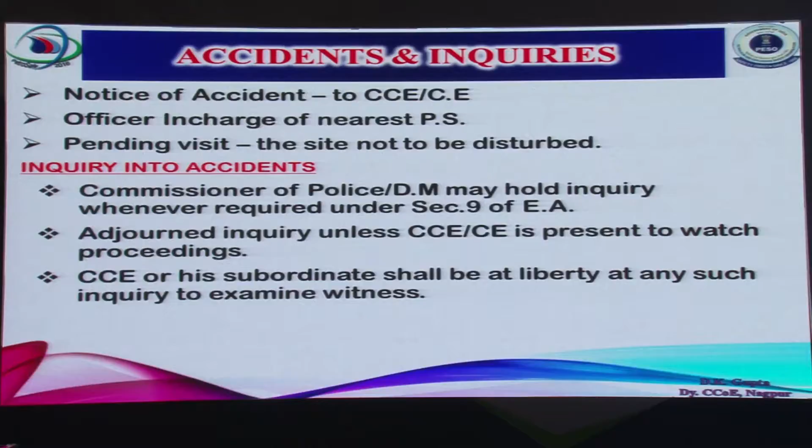When our officer reaches the site, it will be found completely disturbed. Then it becomes a mere formality - the officer will go, we will also give some cause for the accident, and the matter is closed. Yesterday we had a lengthy deliberation that we should have a database for accidents.

Can we have a database like this? We have to have self-regulation. Without self-regulation, nothing will move.

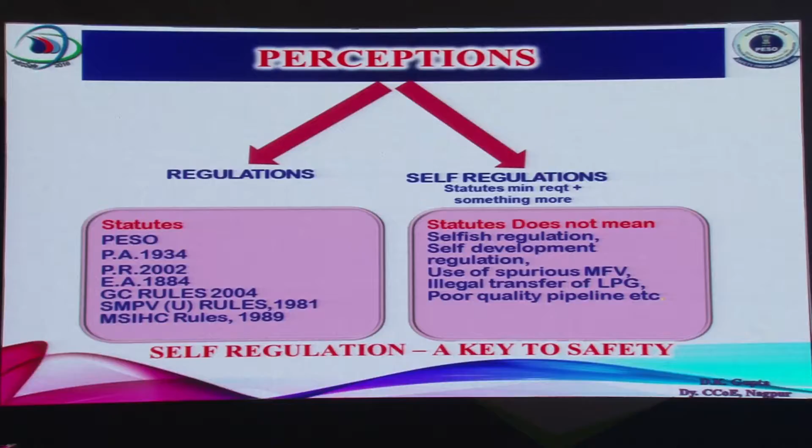The rule says I should only have 10 tons of LPG, then the safety distance will be X. If I have 10.2 tons, then the safety distance will be something else. So what we do normally is say I have got only 9.8 tons. Or I will say 9.99 tons, because the safety distance is 5 meters for 9.99 - I am just giving an example - or for 10 tons and above, it is 10 meters.

So merely reducing 200 kg is not going to reduce the hazard. So think in a positive fashion. Your perception has to be good. Otherwise you will lead in such a way that you are trying to fool yourself.

What initiatives have we taken? We have amended SMPV rules and fire rules to include new technology such as internal excess flow check valve, LNG, and cavern storage, testing, and inspection that have become part of the SMPV rules.

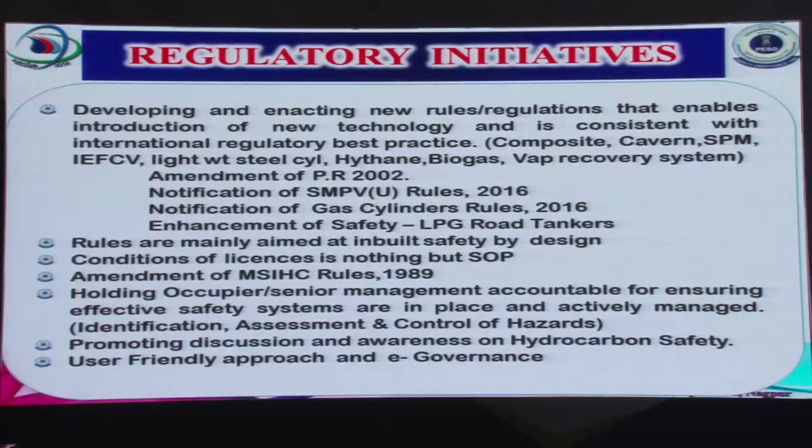Gas cylinder rules are also newly superseded, replacing the old 2004 rules, with a lot of inclusions. You will find PESO will never be a hindrance to the introduction of new technology, I assure you, provided certain SOPs and international standards and regulations are followed in a very proper, positive manner.

The rules are mainly aimed at inbuilt safety design. If you see any of our rules, whether it is SMPV, petroleum, or gas cylinder, the objective is to have inbuilt safety in the rule itself, because it is assumed that these rules will be followed by everyone, right from small scale industry to large scale industry. So rules are framed in such a way that they have an inbuilt safety feature.

But again, the hazards depend upon the inventory of chemicals. That's why after the Bhopal disaster, MSIHC rules were framed. So many additional requirements were placed on the occupier. Now the occupier was made responsible - if something goes wrong, you will be prosecuted. So higher the inventory, higher the hazards, and more responsibilities are placed on the occupier, so that he will ensure nothing goes wrong in my plant.

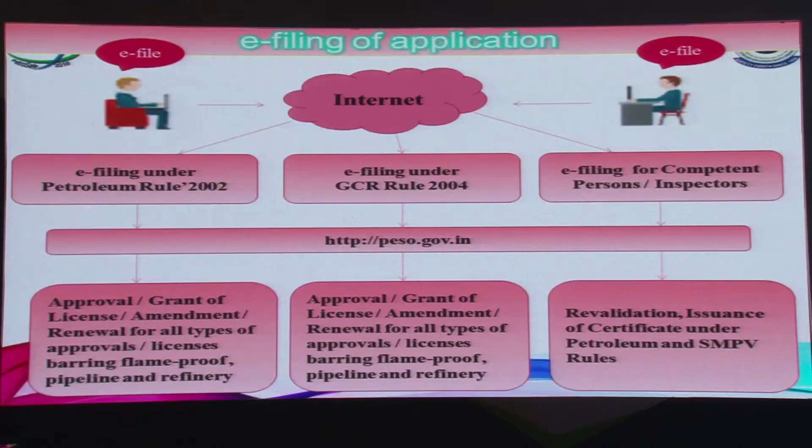A competent person can now have their own recourse - they can peruse how many certificates they have issued in the past, and PESO is also closely monitoring all these activities. I think CC needs a very big round of applause for the auto renewal application filing, because it was his initiative that prompted all of us to work on this. I don't want visitors coming to our office from various distances - let them have the facility from their house itself. We are moving in a positive direction, and probably in the coming months, you should have more auto renewals through your houses.

Now, the area of concern with respect to regulatory bodies is that the compliance is not being done properly.

We can't afford to put officers in each premises. You have to have self-regulation. The moment I say self-regulation, it doesn't mean that since the officer is not going to come, I will come to know only when my industry neighbor informs me, or only make my house right when the officer is about to visit. That will not work, because you are trying to fool yourself. Ultimately, whatever you are doing is for you, not for me, and public safety at large will be affected. So try to have self-regulation, comply with the rules.

Rules are not your enemy. Rules are made for your safety. Although helmet is not compulsory, we should still insist our children wear a helmet. That is called self-regulation, because ultimately you are protecting the life of your own family.

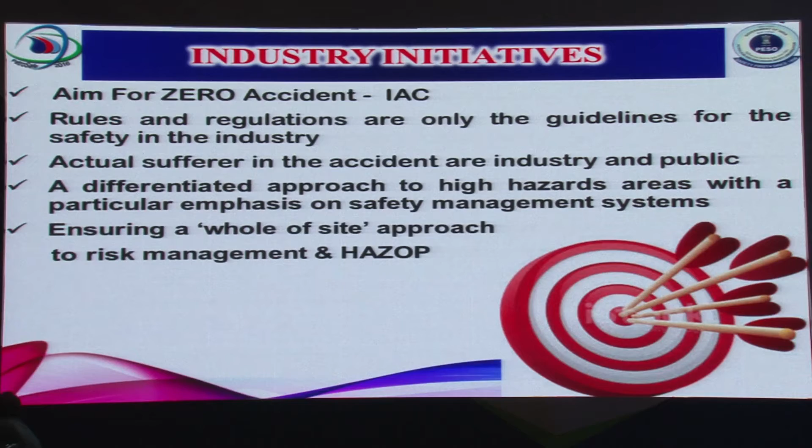So in order to achieve what I have said, you have to have the aptitude, the attitude. I should have aptitude. If I have got the aptitude, then I will also have the attitude. I should have a skill for execution. If I have no skill, I cannot execute it properly. I should have knowledge of the technology. I should have knowledge of the hazards associated with the facilities. If you have aptitude, skill, and knowledge, ask yourself whether you have all three. If any of the elements is missing, you will be driving in the opposite direction.

So believe in yourself. Little faith says, I can do it. Big faith says, I will do it. Great faith says, I have done it. PESO believes in great faith. So I also appeal to you that you go for the third one. Nothing is impossible when you believe in yourself. Thank you very much.